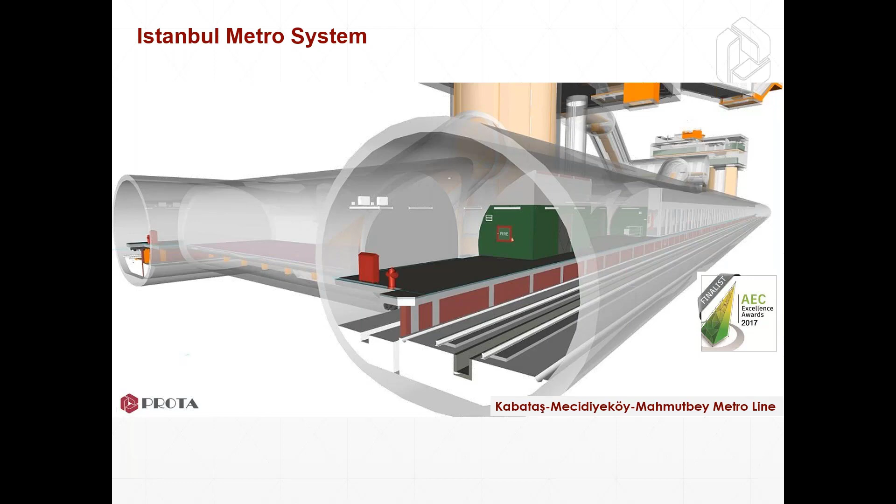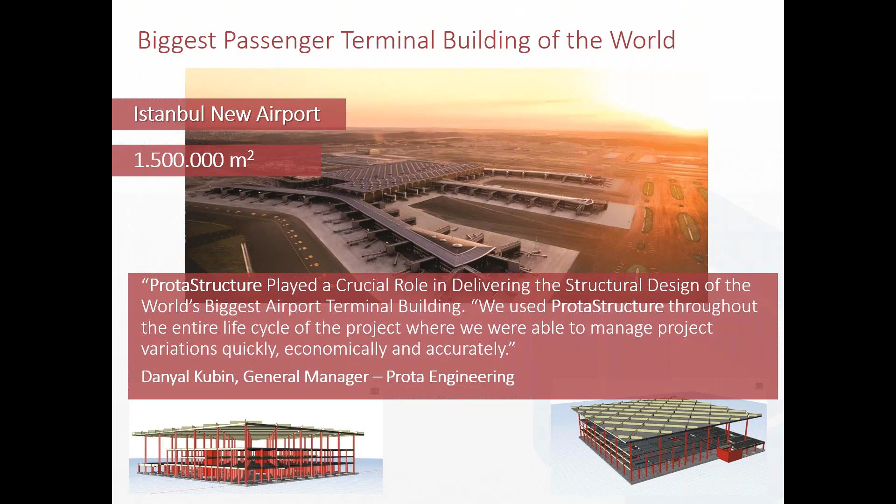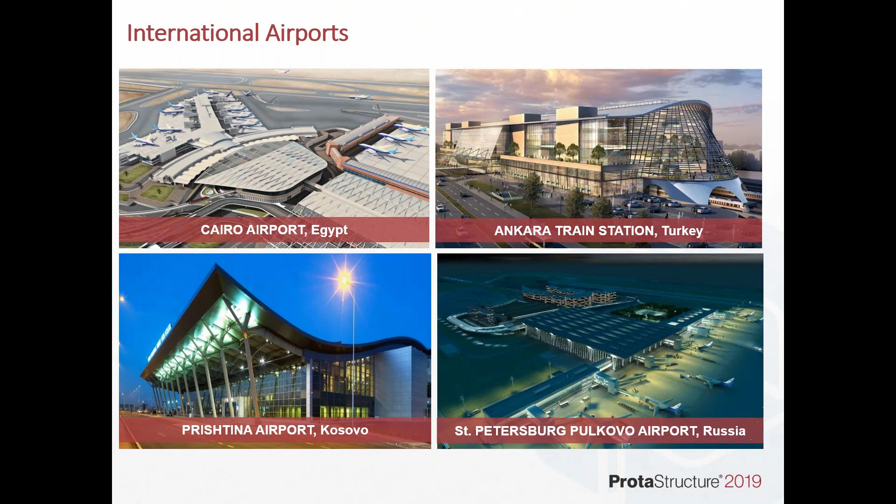So we've been involved with delivering some really interesting projects over recent years. The metro stations, much of the metro in Istanbul, as well as in Eastern Europe, we've been involved with designing. We did recently finish the new international airport in Istanbul. This is the largest terminal building in the world, and the delivery of this was a very tight schedule and posed numerous challenges, and the software allowed this to be actually delivered ahead of time in what was a very demanding project. We've designed other interesting buildings around the world, numerous airports, high-speed rail facilities, industrial and civil structures we've been involved with. A really interesting mix of projects that have been used within our practice.

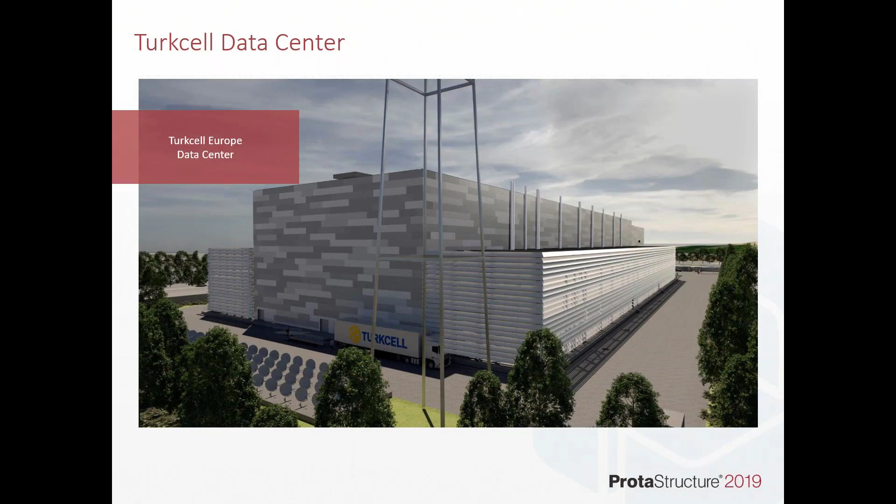So this has helped shape the software, but I guess what's also extremely important is the feedback that we get from our user base. We have thousands of users around the world, and some of them are very vocal, and that's fantastic. And this is something that we incorporate into the product as it's been evolving over the years.

So today I'm going to talk about ProtaStructure 2019 SP7. We've been progressively introducing new updates to the platform. So the development in a way has evolved, and it's not just a case of us annually releasing a new version, or maybe with 1 or 2 service packs. We're now constantly developing and releasing new functionality into the platform as it evolves. So over the course of the last 3 or 4 months, we've actually introduced 2 or 3 major service packs, which have introduced a lot of new functionality that we've wanted you to start to enjoy.

Now, Prota platform is made up of 4 main components, and I'll talk about those in more detail, but in general terms, ProtaStructure is for modeling, analysis, and design. We have ProtaDetails and ProtaSteel, which allow you to produce both your concrete and steel drawings and steel connection design. And we have ProtaBIM, which allows us to integrate with other BIM platforms like Revit and IFCs or ArchiCAD and the like, seamlessly communicate with those platforms.

So ProtaStructure, what's the concept? Well, it's a structural BIM design solution for both steel and concrete structures. And the idea is that we're working with physical objects, physical modeling, to develop models very quickly. And from that, we can then automate the analysis and detailed design to a range of different codes around the world.

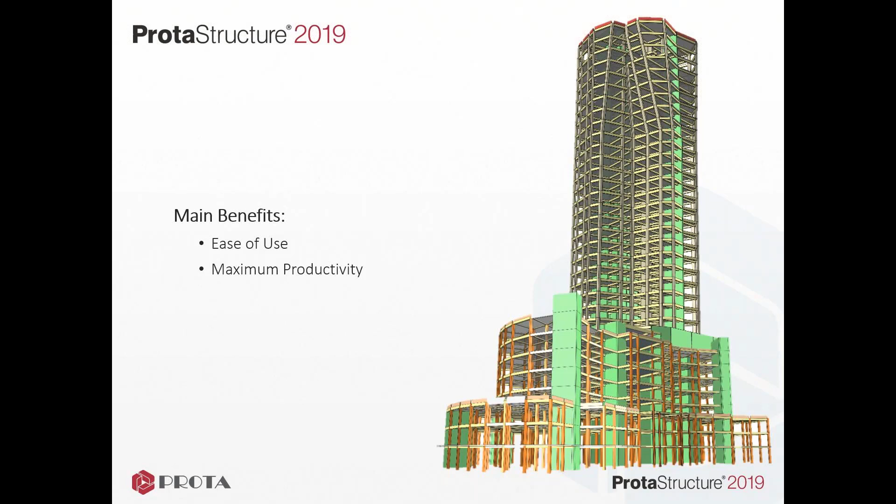So ProtaDetails takes the model from ProtaStructure, and then it takes the design and automates all the drawing production. So all your key plans, elevations, sections, right from the roof right down to the foundations are created within ProtaDetails. It's also a complete CAD system, and you can happily draft in it as well.

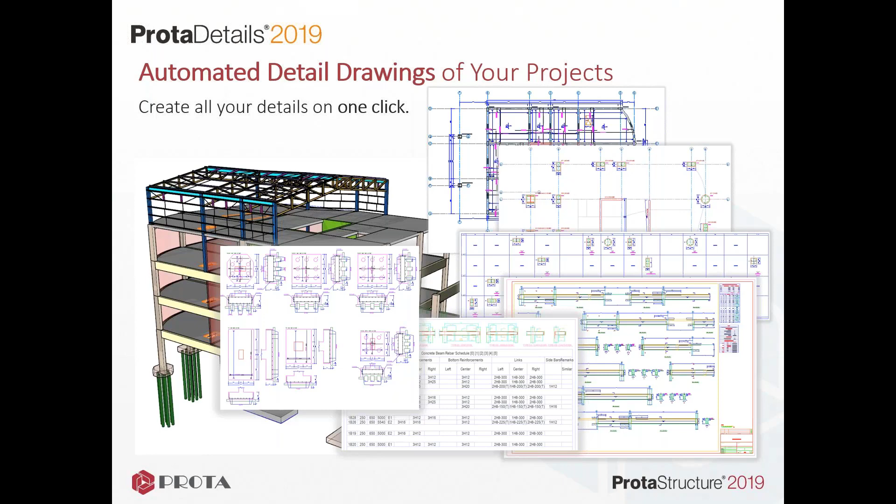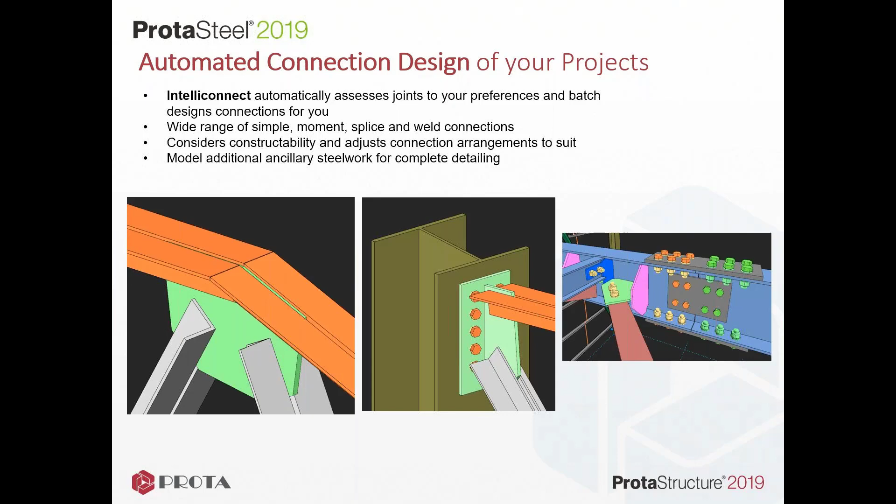Now, ProtaSteel, on the other hand, allows us to take information from ProtaStructure and then move this into designing the connections and producing all the detailing. And I'll touch on these systems during the course of today.

Now, BIM's increasingly important, and because we are a physical structural BIM design-based model, we're able to seamlessly communicate this with other platforms like Revit, ArchiCAD, Tekla, IFC links, and all this is available within the platform. And because it's physical, this is very seamless and easy. So if you've got drops and offsets and openings, all those types of things are very easy to communicate back and forth. And the idea is that you can send models out to, say, Revit, where we have bespoke links, and you can start the process of coordination on your project.

So you may be sharing it with an architect or other project team members. You can take the model into Revit. You can sit down and coordinate things within Revit. If there's changes, models can be updated and then communicated directly back into ProtaStructure. And you can do this as many times as you like to coordinate your projects.

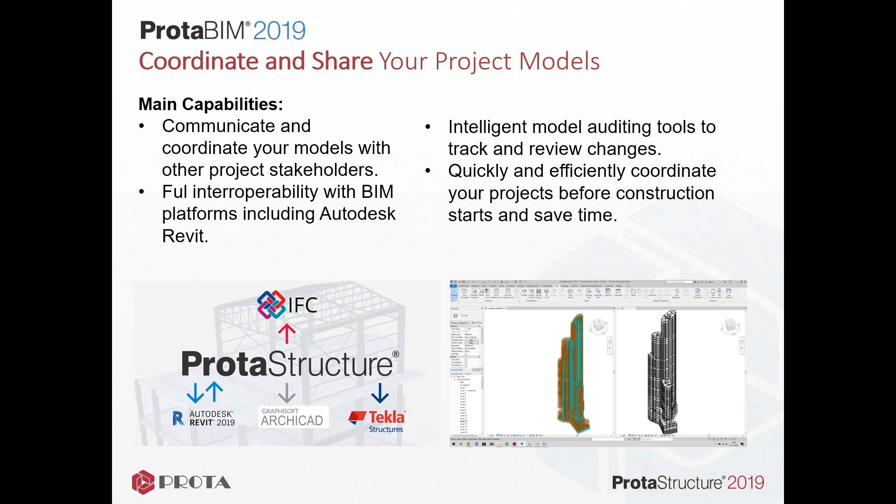What I did want to also cover is just very quickly what's new since our previous service pack. There's actually a lot. We've done a lot in the last few months.

We've introduced performance-based assessment and design. For users working in high seismic zones, this will be very welcome. This covers things like nonlinear pushover and nonlinear time history analysis. You can base this on existing design already done from ProtaStructure, or you can predefine steel within the model based on site survey.

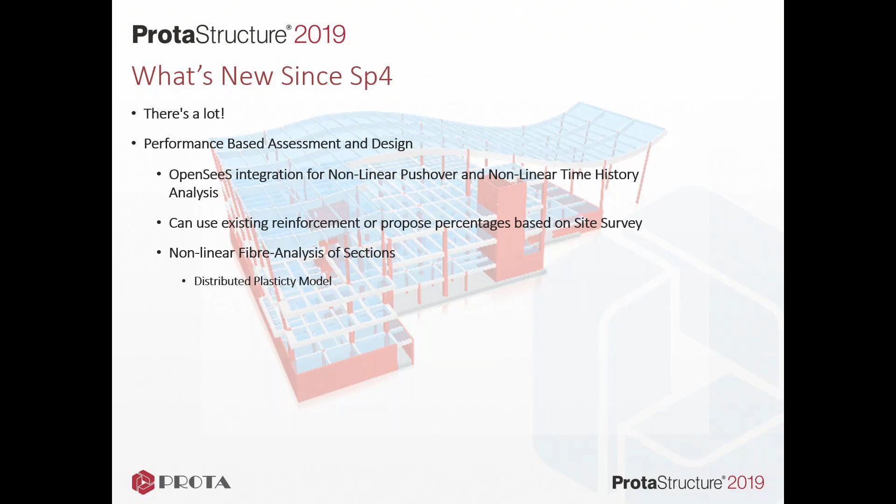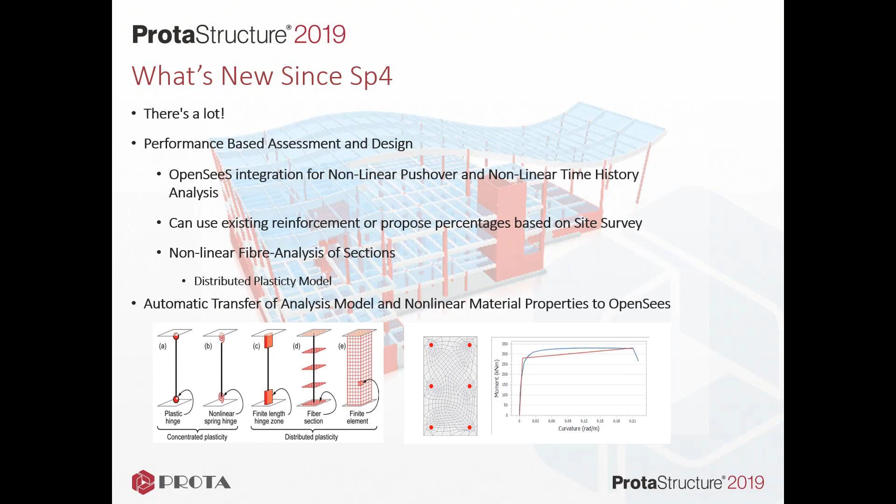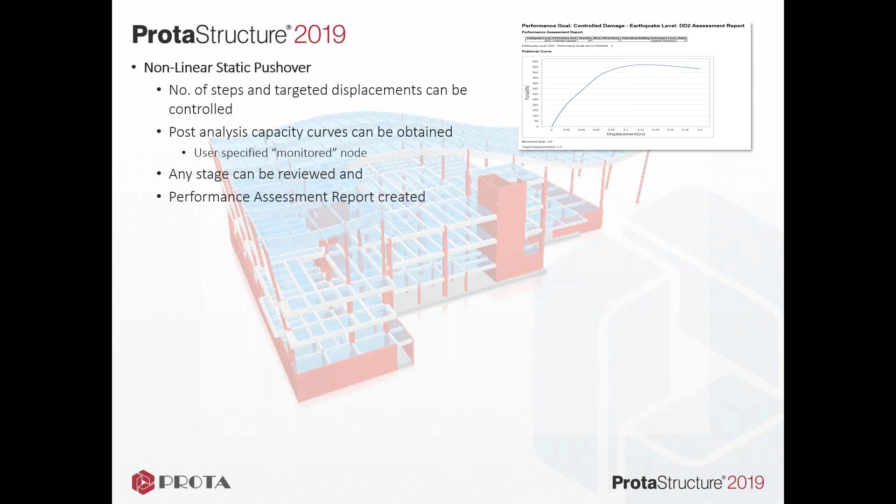We use quite a sophisticated nonlinear fiber analysis model where we use distributed plasticity to create the model that we feed OpenSees. It will then carry out the performance-based design and produce a range of different reports. So if you're doing static pushover, you can look at different capacity reports, whether it's for life safety or immediate occupancy. You can look at these reports. Any stage can be reviewed, and we'll create a detailed assessment.

For nonlinear analysis, the interesting thing is that you can load different earthquake events from around the world, and we will automatically scale these for you. So depending on the code requirements, maybe you're using 7 or maybe 11 different events, we will automatically scale these against your required response spectral curve for design. We will look simultaneously in different directions at these as well, and we will also assess this against code requirements.

So if you are looking at doing performance-based assessment of buildings, this is an invaluable tool, and I'm sure you'll find this very, very helpful, particularly because we prepare all the data for you and we will do all the post-processing. Normally if you have to do these yourself, this can be extremely time-consuming.

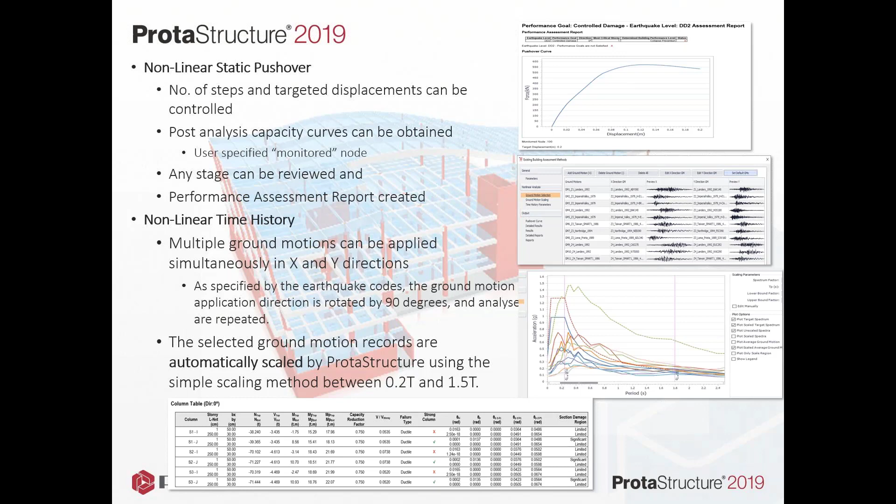We've introduced new 64-bit architecture for the analysis, and this has introduced significant speed and performance enhancements. This is coupled together with our new analysis post-processor. Have a go with this. This is a new processor that's going to be used with the 2020 version.

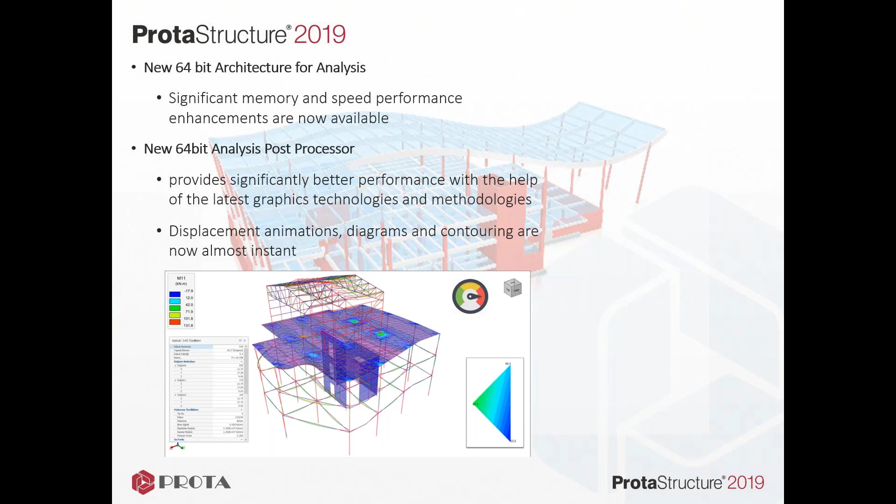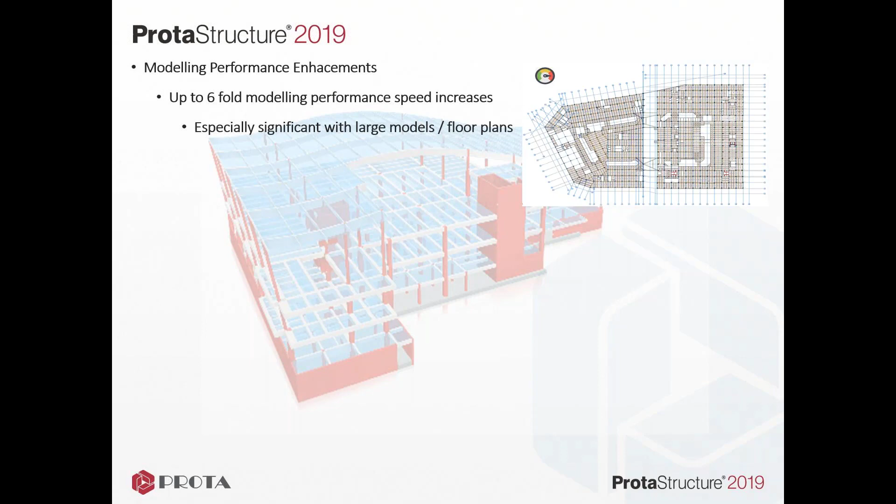Modeling performance has also been significantly enhanced. If you've got large models, you'll see much faster, much improved performance, particularly if you're getting around models and making changes and editing, you'll see that this is significantly faster.

If you're doing complex arrangements, maybe you've got eccentric transfer floors where you've got columns sitting on the edge of, say, wide transfer beams, there are tools now available where we automatically can pick this up and consider the torsional effects in the design of that beam. So you do need to mark the column as a transfer column, and then that will automatically be taken care of.

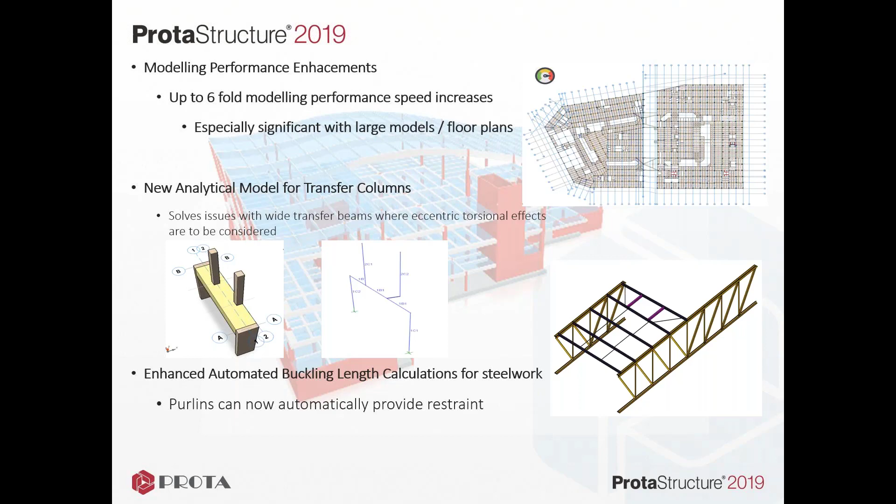We've enhanced the automatic buckling length calculations for the steelwork. Purlins can now automatically provide restraint, and you can end up with more efficient design.

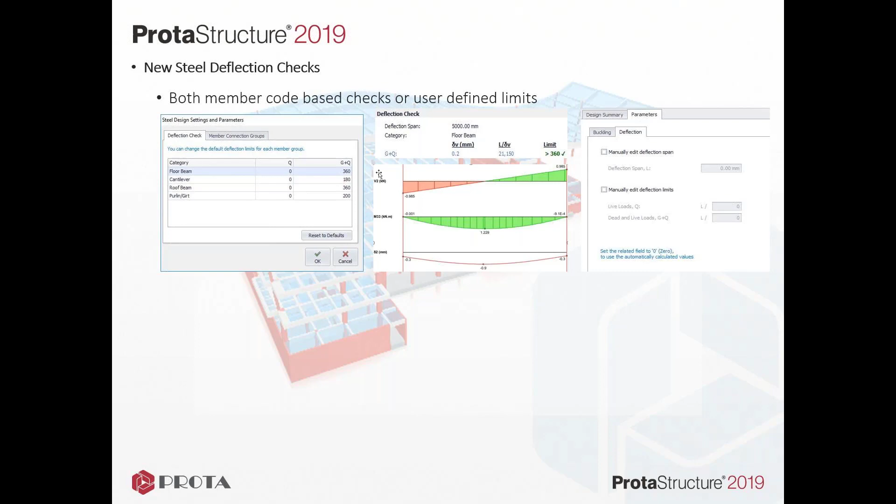We've also got new deflection checks. These are both code-based as well as user-defined, and depending on the element within the model, you can specify various deflection limits. There's lots of flexibility that we've introduced with being able to model and define different types of configurations, both trusses as well as purlin systems.

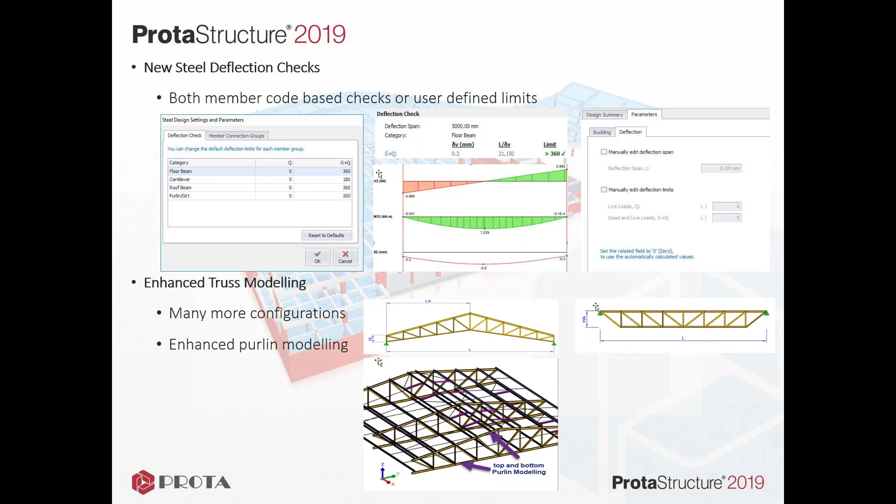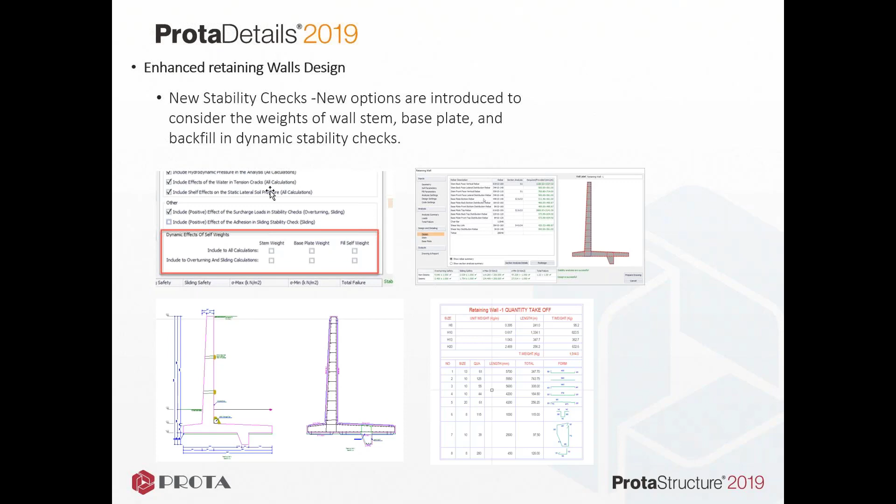Retaining wall design has been enhanced, and there are new stability checks that we've introduced. These will be particularly useful in seismic zones.

We've also been working a lot on the detailing, and you'll see with Service Pack 7, as you would have seen with 6 and 5, that the detailing has improved tremendously within ProtaDetails, particularly in elements that are things like sloping, with openings, with tapers, these types of things. We're using precision detailing to create now.

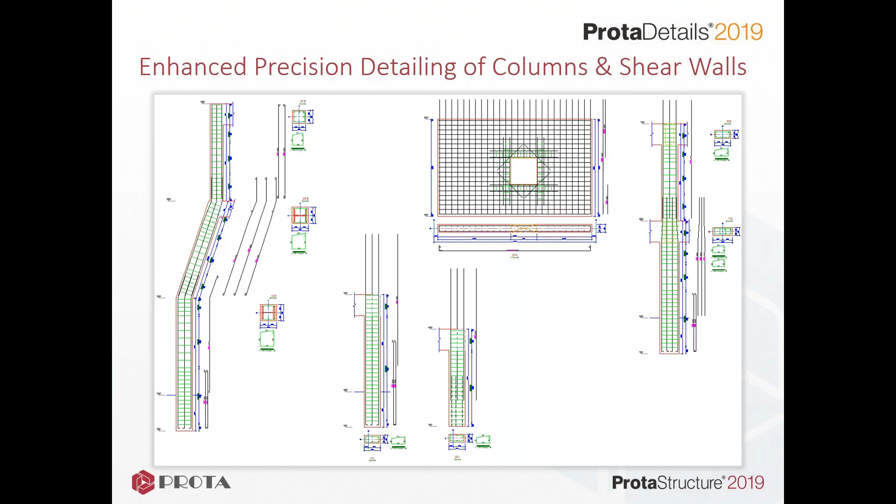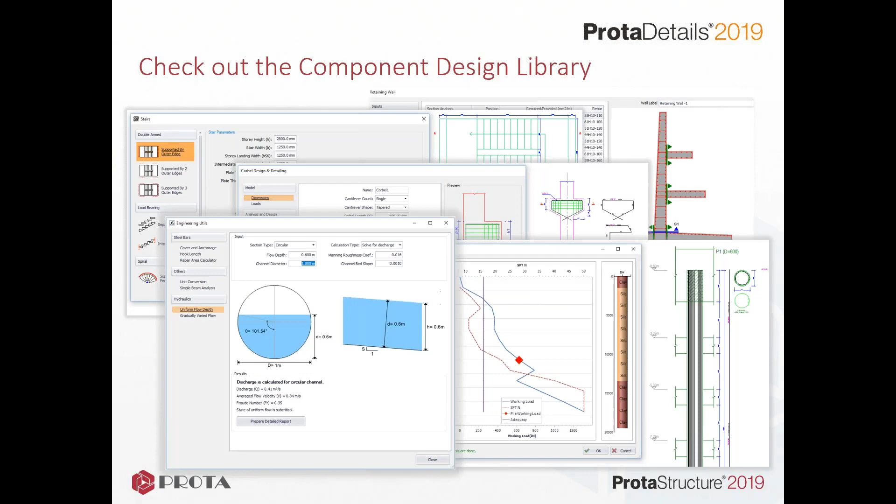Don't forget to check out the component design within the library. I know I didn't touch on this today, but we design and produce all the detailing and all the drawings for these as well. Now these don't just stop at the component design. You can also use this to create details for things like culverts, lift pits, foundations, beams, and so on. There are tools in there to help you with drawing as well.

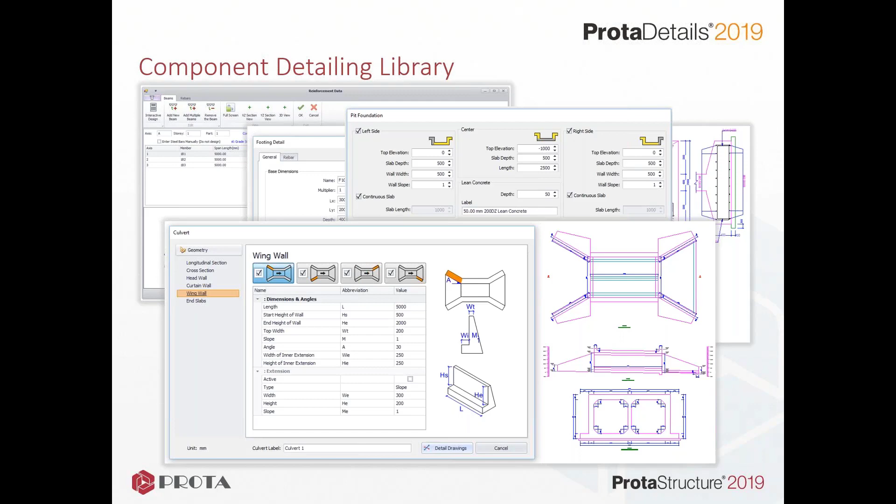Now, I just finished touching on ProtaSteel. In the new update, you'll see that you now have the ability to define checker plate, stairs, handrails can be set up.

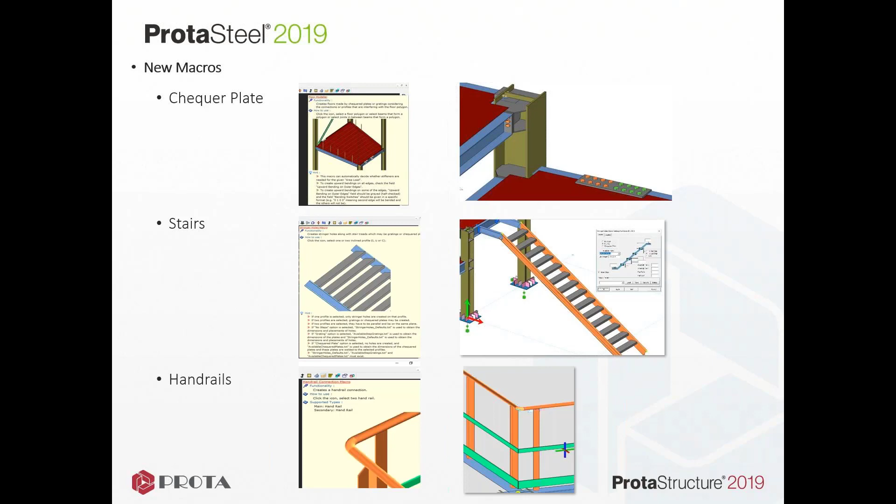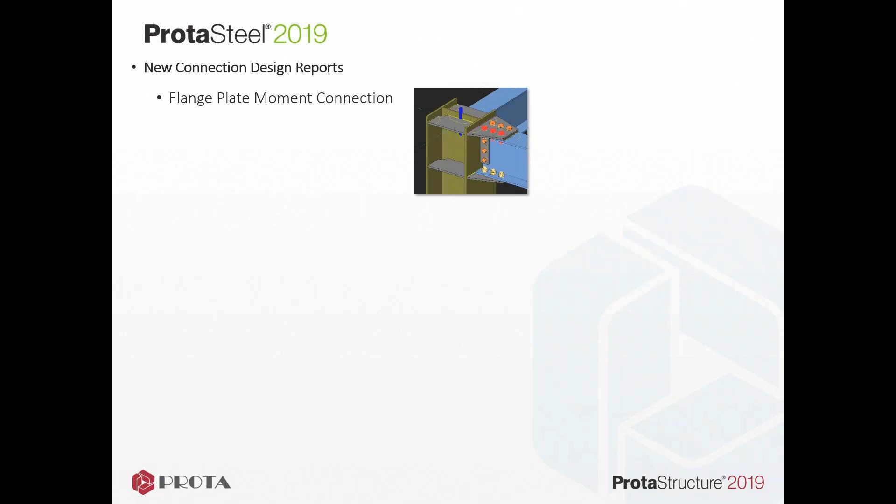We've continued to increase the number of connections that are designed within the platform. We almost have full coverage now, where we're designing and producing all the reports. This includes flange plate moment connection, beam-column welded joint, simple base with stiffeners, moment haunch connections, and these are added to the many other connections that we're designing and documenting within the system.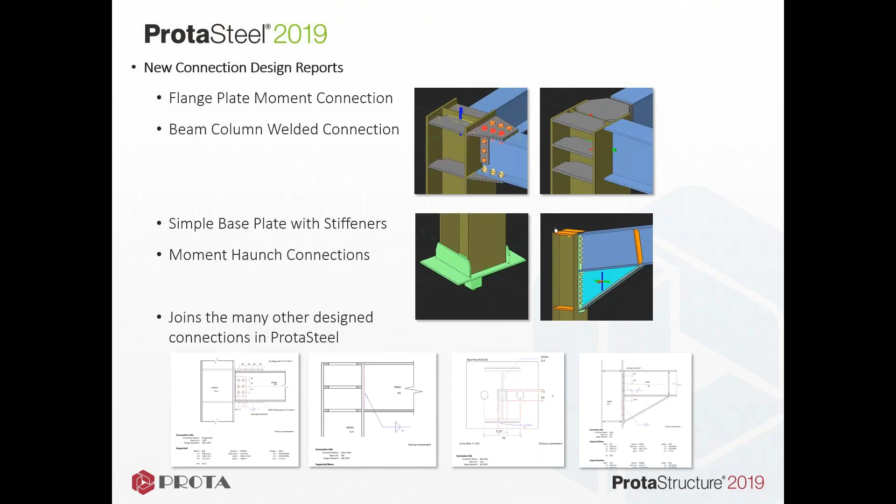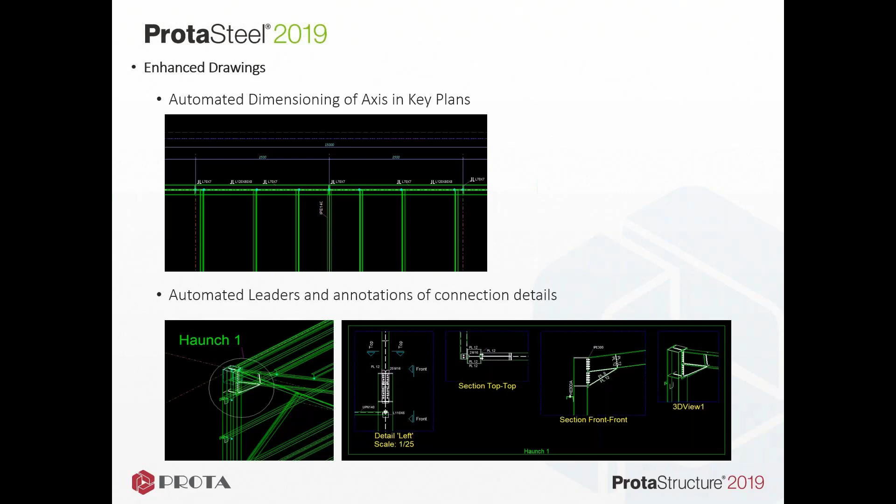We're also automatically dimensioning axes in key plans, and we've enhanced the leaders and annotation of connection details to make this more seamless for you.

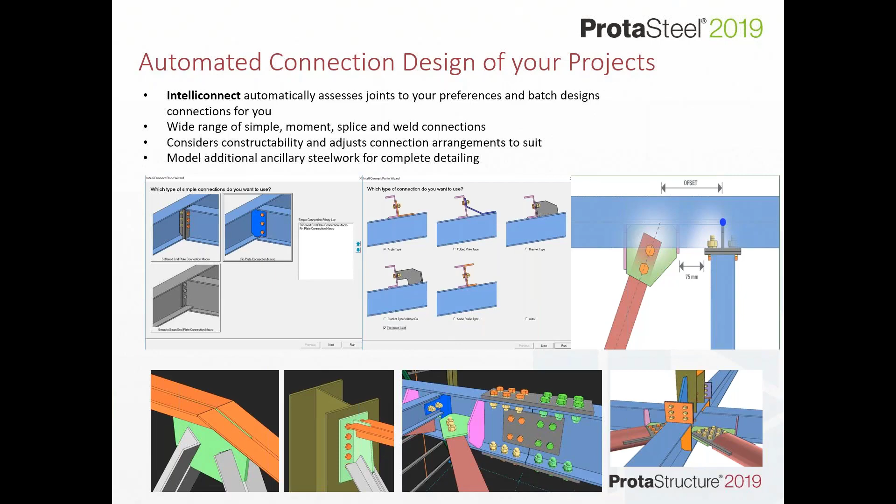Don't forget to take advantage of IntelliConnect. This is a fantastic tool for being able to design and detail your steelwork very rapidly, and a really amazing technology. If you get the opportunity to do a bit of steelwork, take a look at this. For those doing a lot of steelwork, you can set up preferences for different types of jointing preferences, as well as different company standards. For example, a fin plate connection, you might want a minimum number of 3 bolts for a certain type of section. That can be customized to suit your requirements.

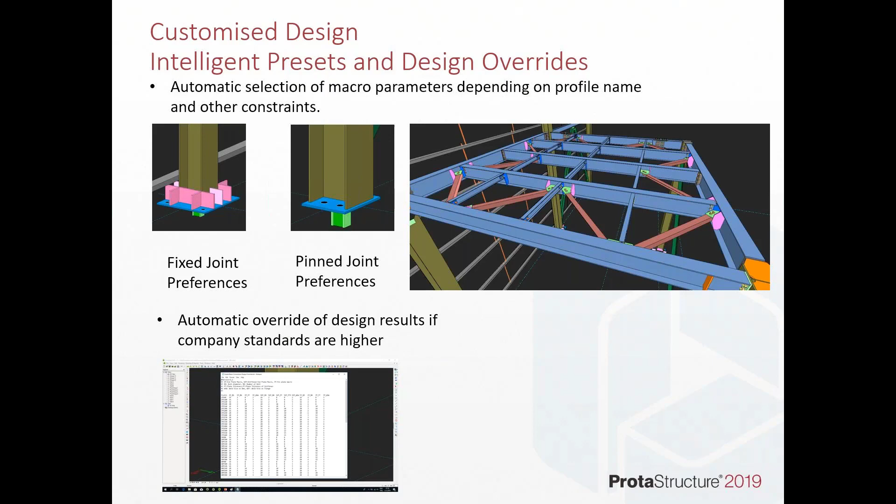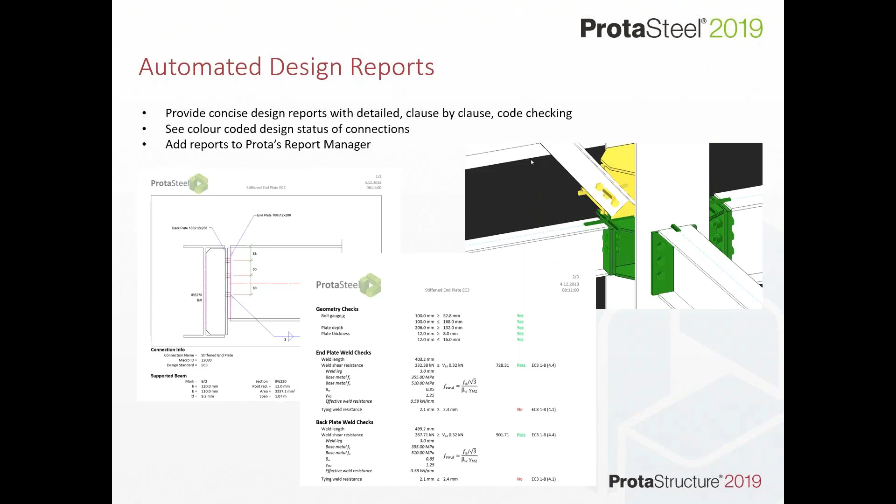All the design reports, as I mentioned, are documented. You can visualize these as well. They're all color-coded, so in the model, if you want to see if something's been designed, you can choose the visualization and see whether that's satisfied the code or not. Obviously, we're then producing all the detailed drawings for your project, as well as going right down to fabrication detailing if that's required.

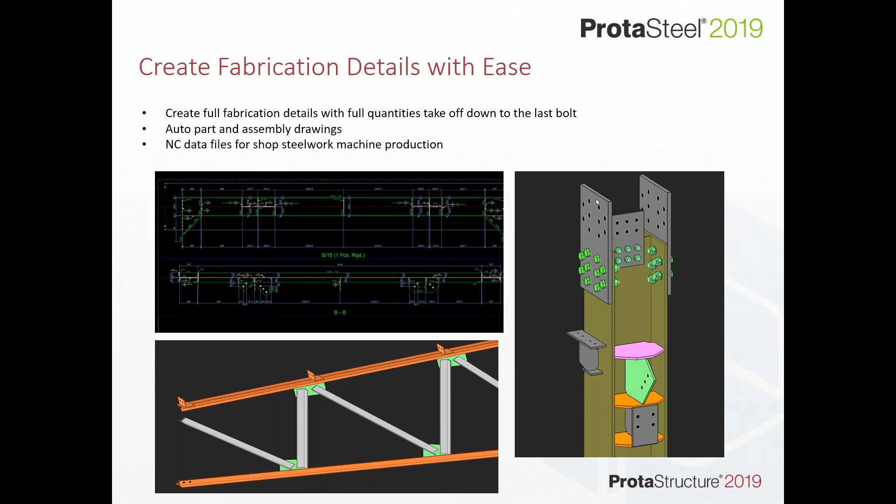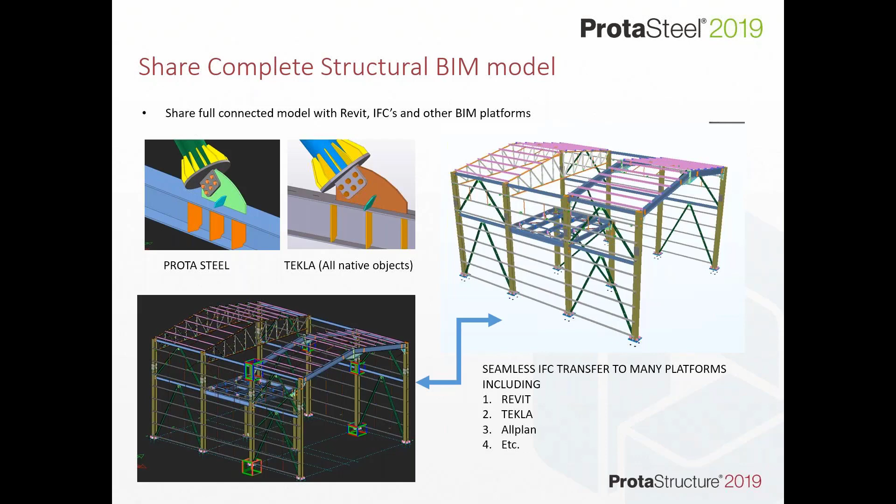Now, any of these models can be shared out. We have intelligent links from both ProtaSteel and ProtaStructure out to BIM links, out to Revit, Tekla, or Allplan. All the details you see can be seamlessly linked out to those platforms. We've also enhanced our ProtaBIM platform, so it now has new integration with Revit 2020, with enhancements and fixes associated with that. We've also introduced new IFC links. We're working very hard on this, so you're going to see more and more capability with IFCs as we go.

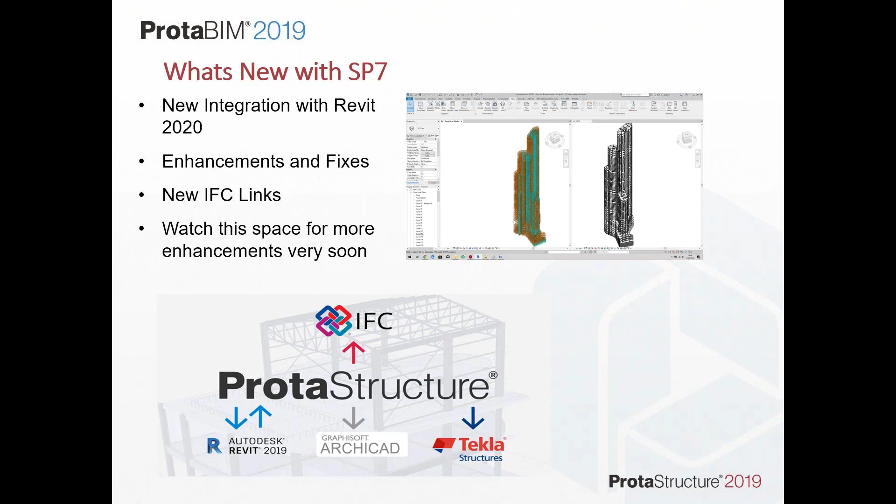So just to conclude, thank you very much for coming, attending today. We're making many inroads around the world, and the software is being used by some fantastic practices globally.

We are striving to create exceptional value and really differentiate ourselves from others. To do this, we're not just providing a building design solution, we're also providing a complete drawing management system. It has complete drawing capabilities, full component design, quantities takeoff. You saw with ProtaSteel that we're also providing full automated connection design, steel detailing, as well as shop drawings and quantities takeoff, and we are providing leading integration with other BIM platforms.

So we're really trying to create one complete system that's fully integrated. You invest in Prota, you get everything, and all of this is allowing you to go end to end with the delivery of your projects.